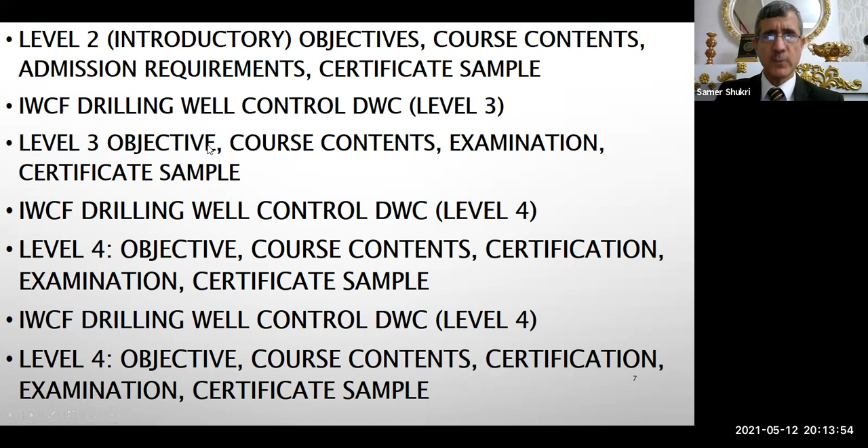Here we have IWCF well intervention. We will talk about drilling and well intervention - program objectives, training levels, program structure, certification, principles and procedures, courses, course contents, well life cycle, and well control. This agenda will also cover completions afterward, and then we will move to typical permanent completions, barrier principle, hydrostatic barrier, types of barriers, then completion components, which we'll take one by one.

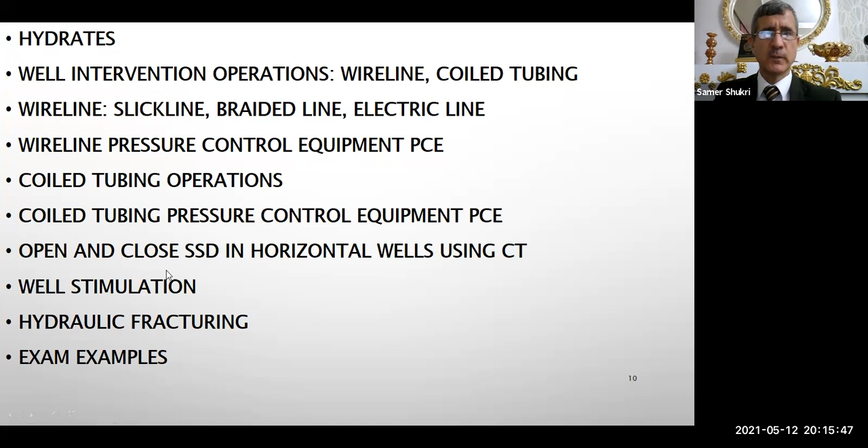Then gas lift system, then well kill methods - we have four kill methods. Then kill charts, we'll explain about them. Even if we take more time, no problem, now you are ready to receive information. We will talk about hydrates that can plug the tubing and flow line. We'll talk about wireline intervention, the types of wireline, wireline pressure control equipment. Then we'll move to coiled tubing operations and the pressure control equipment, opening and closing SSD in the horizontal section using coiled tubing, then well stimulation, hydraulic fracturing, then exam samples. I will give you the same exam questions and answers that come up in the exam, so at the end of this session you will have an excellent view of what is going on with well control.

Let's move on to the first item in our session for today. So what is well control in oil and gas operations? Well control is the technique used in oil and gas operations such as drilling, workover, well completion, and well intervention, for maintaining the hydrostatic pressure and formation pressure to prevent unintentional influx from the reservoir or formation to the surface or to another formation. So this is the definition of well control.

But how can we achieve this well control? Now I will tell you something about what happened after the incident in the Gulf of Mexico in 2010. After 11 people were killed, and after 4.9 million barrels of oil escaped into the Gulf of Mexico, it was a big disaster that remained for 87 days. The well was flowing into the ocean, into the Gulf of Mexico, and 11 people were killed, 20 plus people were injured, with huge damage to the equipment, the environment, and the reservoir, plus money loss.

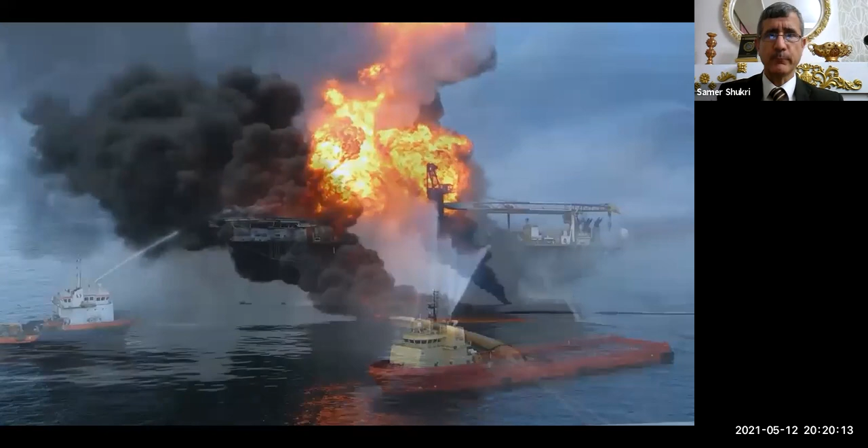The Macondo tragedy, which resulted in the loss of 11 lives, as well as major environmental and economic damage. The International Association of Oil and Gas Producers recognized that all who are involved in any operation during the life cycle of a well in any way should have training to understand well control.

The oil and gas industry operates across a global network, encompassing a vast variety of professions and personnel. It is not only those who work on the rig floor who must take responsibility for safe operations. It may be that someone working on the periphery of the industry lends support or understanding after the crew has had a difficult trip. It may be that someone working in logistics goes the extra mile to ensure that the correct people and equipment arrive on site in good time.

This means it's not only the man who is on the rig or on the well who has to take this certificate. Look at this man, he is driving a road tanker. He is moving liquids and fluids to the well site, and even though he isn't on the well, he has to be aware of what is going on. This man is in the main office of the company, and this girl also, she is watching what is going on at the well. She has to have her own well control certificate.

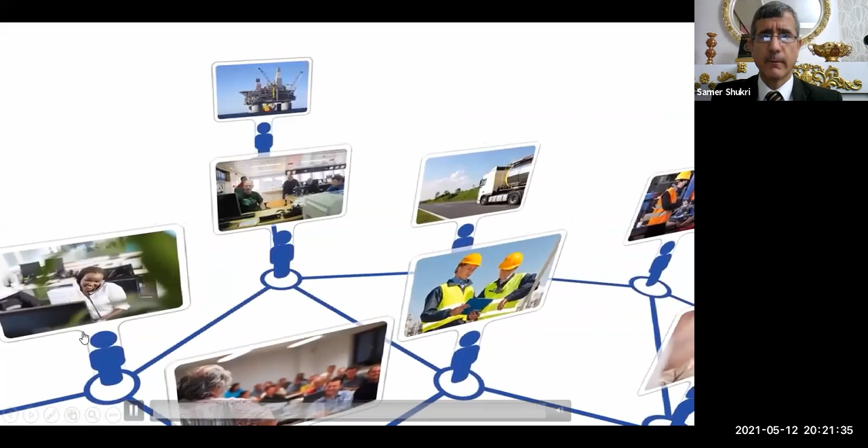Whether an experienced individual or a newcomer to the industry, everyone's input and decisions can have a significant impact, not only upon their immediate colleagues, but also the environment and the safety of personnel across the industry. The International Well Control Forum, in cooperation with Oilennium, has produced a free, self-enroll e-learning program to give knowledge and understanding of the processes that take place during a well's life cycle. While by no means exhaustive, we believe the program will provide people with a broader awareness, which will make their career in the oil and gas industry safer and more rewarding.

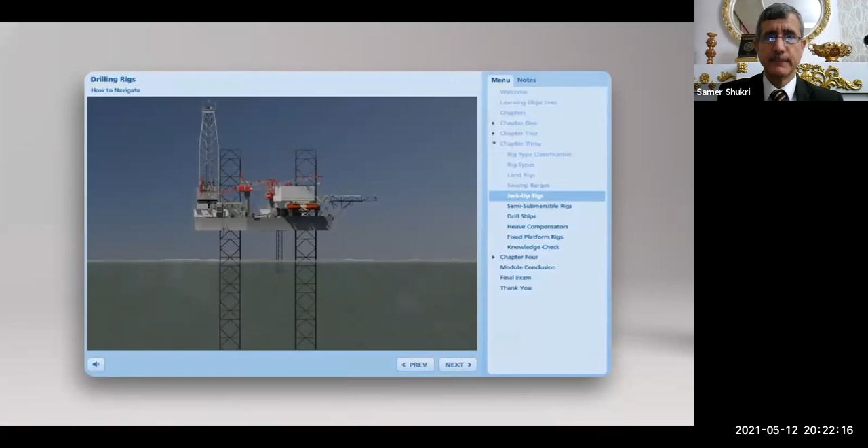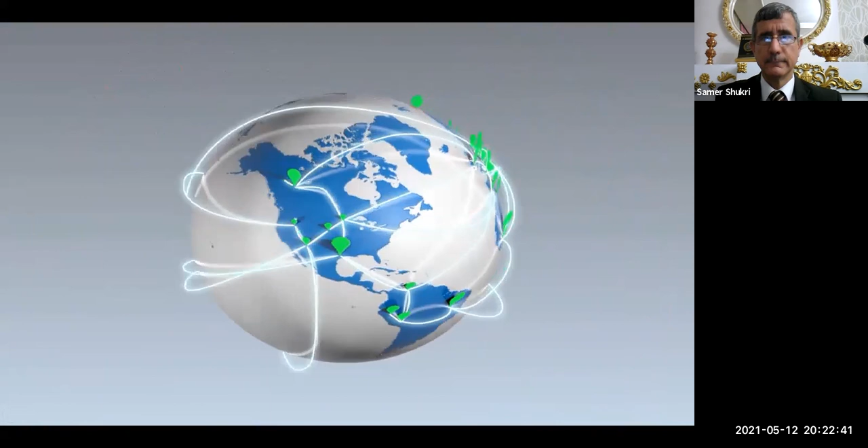Over 7 modules, the program describes the life cycle of the well, shows the different types of drilling rig, explains what well control is, describes how we monitor the well, and explains what well interventions and workovers are. In the first 2 weeks of its launch, more than 2,000 individuals from over 1,000 energy sector companies in nearly 100 different countries enrolled on this course and took a step towards a commitment to protect the environment, our industry, and all those who work within it.

Clear? I think it is clear. So everyone, even if he is new, or old, has good experience or little experience, everybody should have his own certificate. It depends on what his role is in the operation. Is he supervisor? Is he operator? Is he driller? Everything is included.

So everyone has a syllabus. Imagine if we don't control the well, same as what you have seen in the Macondo incident, which is the most dangerous incident, where this huge volume of oil escaped from the reservoir to the environment. In this incident, 4.9 million barrels of oil escaped from the reservoir to the Gulf of Mexico.

It killed the life there. No fish, no whale, nothing. It even arrived to the southern coast of the US. In this case, what happened? All animals were killed. We have a big disaster for the environment, the sea environment, also the coast environment.

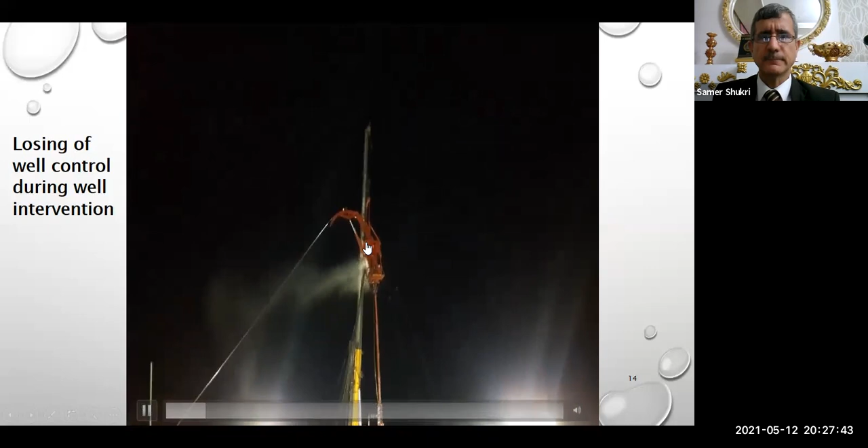You see this gas also, it is escaping during night. A spark, small spark, it will make a disaster. Yeah, it's not good.

Here we will talk about these two sections: this is during drilling, this is during well intervention. During drilling, when we drill a well, there could be losses either from the well to the formation or vice versa. So we may expect that oil and gas will escape and percolate up the well to the surface.

What will happen to the hydrostatic head of this drilling column mud, or drilling fluid? Its hydrostatic head will be less. If it becomes less, then the flow from the reservoir to the surface will increase, and we will have a kick. This kick will lead us to blowout, which we have seen in the previous video or videos.

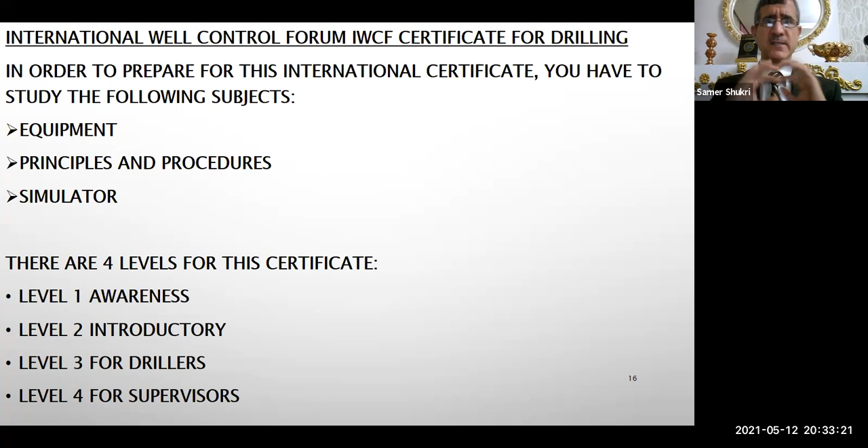But by the end of this course, if you pay attention and can understand what I am talking about, at least you will have knowledge of about 30 to 40%. So if you study more and more, I guarantee you will pass it easily. I will give you examples of the exam given in a normal situation. So I just want you to focus, listen and watch what I am talking about. I'll give you the summary of it - you don't need to go into details here and there. Only focus on this lecture, and I guarantee it will be a very good starting point for you.

So we will talk about this IWCF forum certificate, which is from Britain, and the other one is called IADC, which stands for International Association of Drilling Contractors. This certificate is issued from Houston, Texas, in the United States.

It is mainly focusing on the US fields, and sometimes they ask for it in Saudi Arabia. These are the only two areas, but this one is more difficult. IWCF is more strict than IADC, so if you pass IWCF, I guarantee you will pass IADC, because it is a little easier than this one. British is more difficult.

They focus and sometimes play with words, especially if it is not your native language, so they can trick you with tricky questions. You have to know English and know the technical side, and that is not easy at all. But most of our students pass this exam with high marks, so please focus with me and listen to what I am talking about.

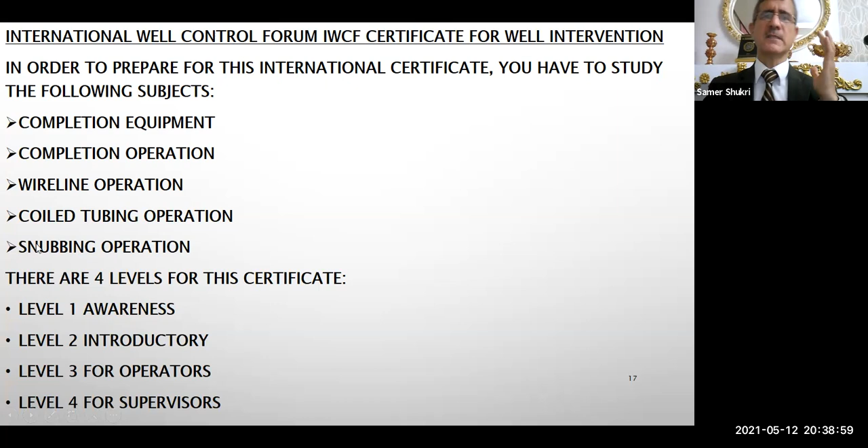But wireline and coiled tubing, you see everywhere, especially in Iraq, Saudi Arabia, UAE, Kuwait, and other countries. You have to study these, plus completion normally. The well without completion cannot be producing.

We have 4 levels. Level 1 is awareness, and you have to do it. You have to choose where you shall go in your career for the future, whether in the drilling direction or production engineering, well intervention, or well services, different names for the same duty. You can do level 1 awareness for drilling or for well intervention, which is called well intervention in both IWCF and IADC.

If you go up, you go to level 2 introductory, level 3 operators, and level 4 supervisor. It is similar for both well intervention and drilling.

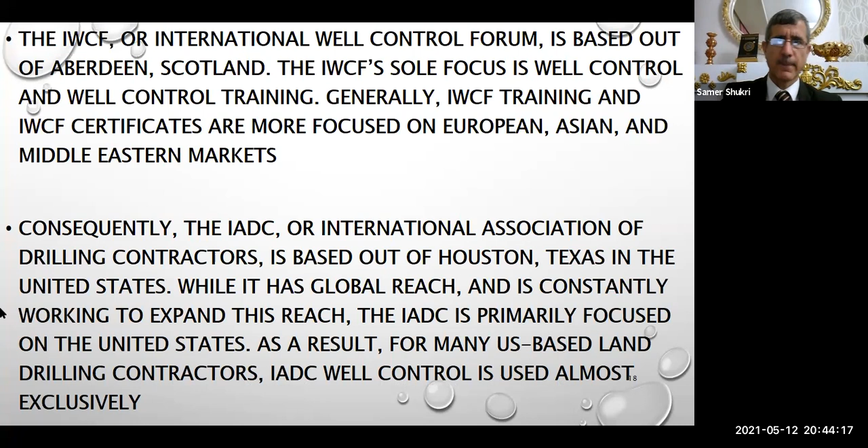I visited this area. I went to Holland, to Shell company, and studied there. So I saw this North Sea. It is a huge and terrible sea.

Let's move on to the next slide. They use different names for course levels, but both IADC and IWCF have identical levels. This one has 4 levels and this one has 4 levels, same. Both organizations in the well control training world recently made fundamental changes to their structures based on a recent report.

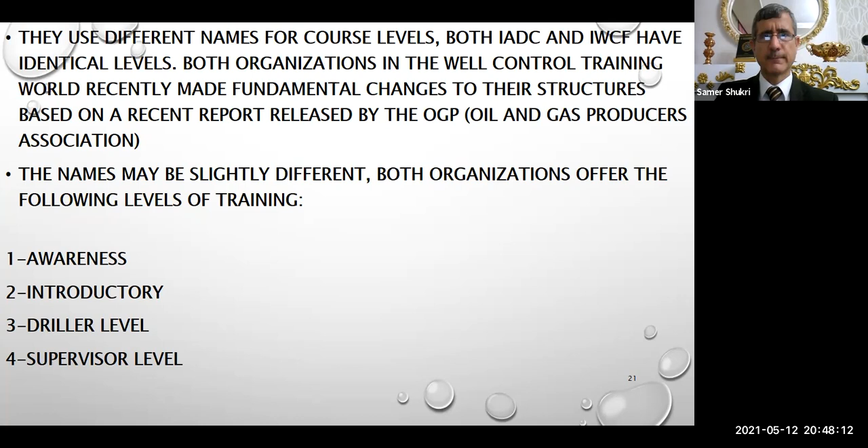Here are the subjects to be studied and assessed. For drilling, we talked about equipment, principles and procedures, and you have a practical assessment. There is something called simulator equipment, as if you are on the rig side, you do this assessment and your result appears straight away. But for well intervention, you have to study 5 or 4 or 3 subjects.

I told you which is mandatory: completion equipment plus completion operation. You have to do these 2 exams, no way around it. Then you can choose number 3 or number 4 or number 5, or this plus this, whatever you want, since you are paying. You can take the certificate. So you can choose what you want before the course starts.

Here, drilling level 1 is awareness. It is a 4-hour classroom-based course currently. So you do this course for 4 hours. There are videos you can watch, and there is a question and answer at the end of each chapter. The total is 4 hours, and the answers are very easy. I will tell you how you can get it, but it is a 4-hour classroom-based course currently included in a 3-day essentials, but now it is done online.

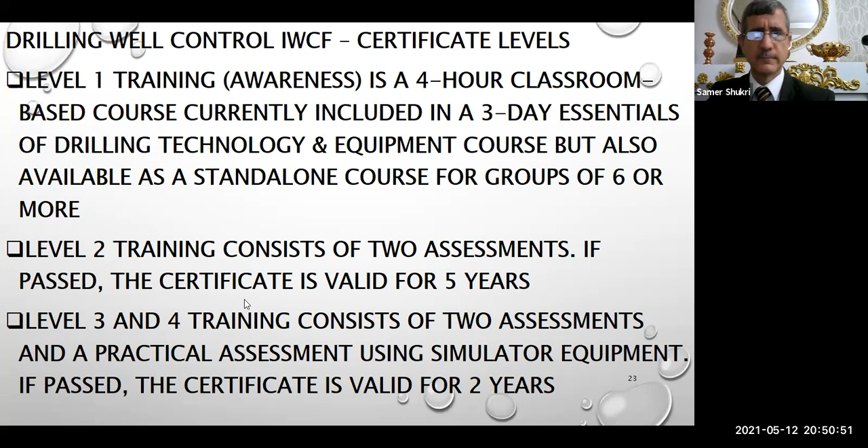Here, level 1 well control awareness training was introduced in 2015 as part of an industry-wide initiative. What does it cover? It covers basic well control concepts and is included in Aberdeen Drilling School's 3-day essentials of drilling technology and equipment course. Here, to register in level 1, you can keep this email with you.

It is very easy. Level 1 at iwcf.org, you will see it in the video at the end of this course. You will keep your video with you, and you will see that you can pass it easily to the website of IWCF. You see, if you write this, I took a snapshot, you see it: www.iwcf.org/programs/level1/DS. You will see this one.

It will tell you where to go, group level 1 course. So you can go through them, and you will see that it is easy. They tell you how to go into this level, how to register today. This is the website of IWCF. Register today. If you want to use the email also, they can guide you. So it is very easy.

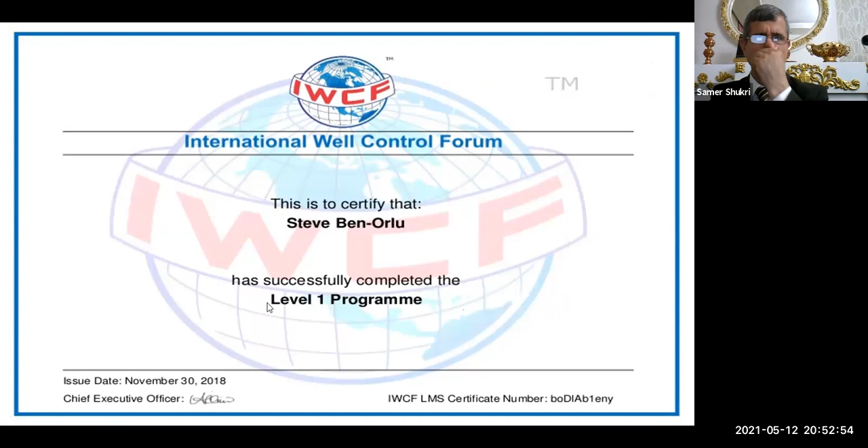Here, level 1 also, what does it include, and the validity, and so on, successful completion - all of these we covered. Here, you see this certificate. Every one of you should show us this certificate by the end of this month. It is easy, either for drilling or for intervention.

You see here, this is to certify that Steve Ben-Orlu has successfully completed the level 1 program, and here is the signature of the CEO of the IWCF. It was issued at the end of 2018, and it has a certificate number - you see this one, BODIAB - and so you can take it with you.

Here, drilling also, we will talk about drilling well control level 2. This introductory course provides drilling personnel with basic understanding of well control. Here you have to dig deeper, but if you don't go through level 1, you will not be able to go to level 2, then level 3, then level 4.

So it is like a building - you build this one above this one, so the science is a structure. If you want to jump without a base, in this case you will fall down, and your neck will be broken.

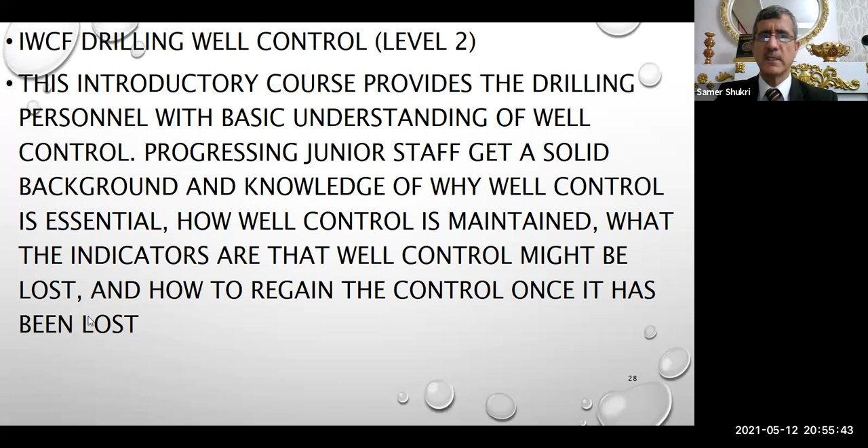Here, he has a solid background and knowledge of why. Here, he has to be responsible. Now, in awareness, you are not responsible to do anything. But here, he has to be responsible for well control. He has to open, to close. He has to do something during an incident scenario, how well control is maintained, what the indicators are if well control might be lost. So he has to make his brain work, and how to regain well control in case it has been lost.

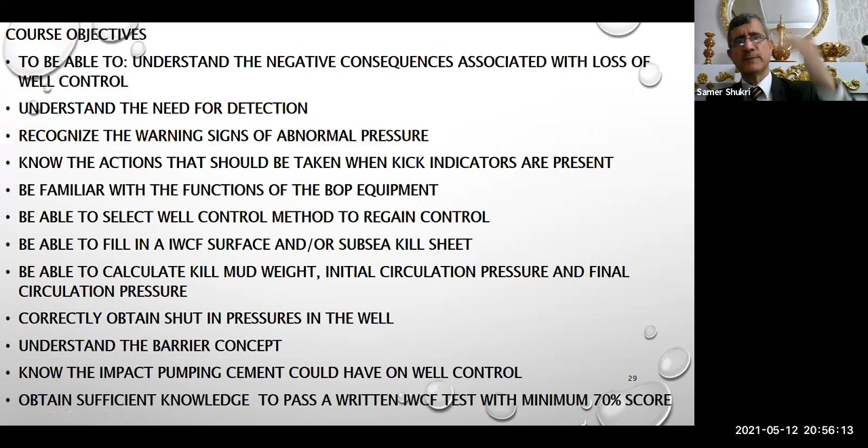Here also the objectives, you can go through them for yourself, because you have to go from level 1 in the future to level 2, from level 2 to level 3 to level 4. So just for your information, please. You see course content, this is for level 2.

Here also the assessment exam, there is a normal exam here. They have to give you a certificate for 5 years. The validity is 5 years. So for these 5 years, you have to be competent.

You have to do surface equipment for 1 hour and 10 minutes. Surface principles and procedures, 1 hour and 45 minutes. Then combined surface and subsea - this is for offshore, also same time. Here, combined surface and subsea principles and procedures, same time.

This one, sample of level 2. You see, this is temporary. So after you do the exam, they give you a temporary certificate. It is valid for 3 months. After 3 months, it will expire. You have to take the normal one, which is for 5 years for level 2.

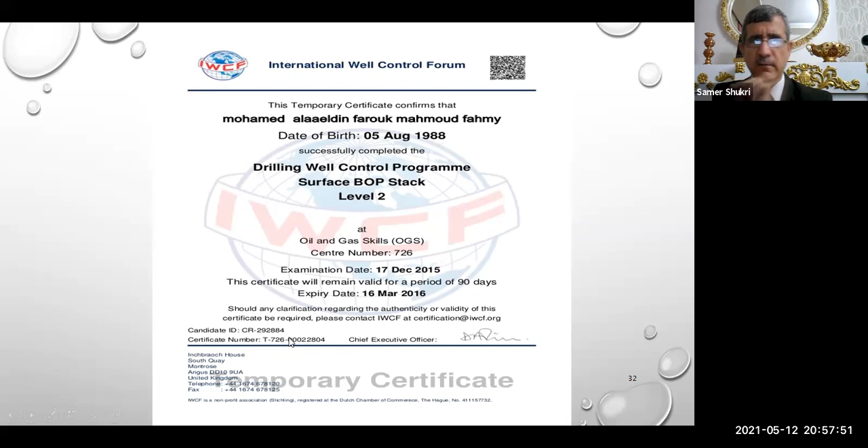For level 3 and 4, it is valid for 2 years. You see, his birthday is written here, 1988. Here, the certificate number also, candidate ID, and the CEO, Chief Executive Officer of the IWCF. So it is formal, and it allows you to work in any reputable company in the world.

Here we have also level 3. This level 3 objective, now you dig deeper for level 3. The IWCF drilling well control level 3 course has been designed for whom? Who can attend it? Anyone expected to shut in the well, such as drillers and assistant drillers. So everyone has his own function, position, or responsibility. This level 3 is for drillers and assistant drillers.

The course aims to reinforce and improve the candidates' existing knowledge and appreciation of the various stages of shutting in the well, in case of kick or blowout. So the engineer or supervisor by himself will do nothing by himself. He needs the driller, he needs the assistant driller, he needs other people to help him. Otherwise, he will lose focus and not do his job properly. So everyone on the well site has his own responsibility, and he has to know what is going on and take quick action in case of any kick or blowout.

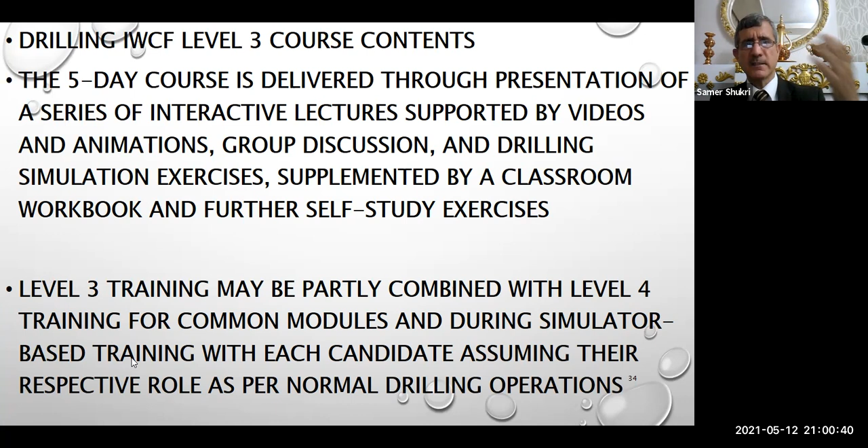You see, level 3 training may be partly combined with level 4. So in many cases, they are very similar, level 3 and level 4, but level 4 is more advanced. With level 3, they give you 26 questions in well intervention, while in level 4, they give you 28 questions, 2 additional questions. For other materials, it's the same. And the same validity, level 2, level 3, and 4, for 2 years.

Here we have also the time for the exam. You see it, 1 hour and 45 minutes - this is for principles and procedures. While for equipment, it is 1 hour 10 minutes. Here for working in the subsea offshore. Here is the sample of the certificate. Also, this is a temporary certificate, level 3.

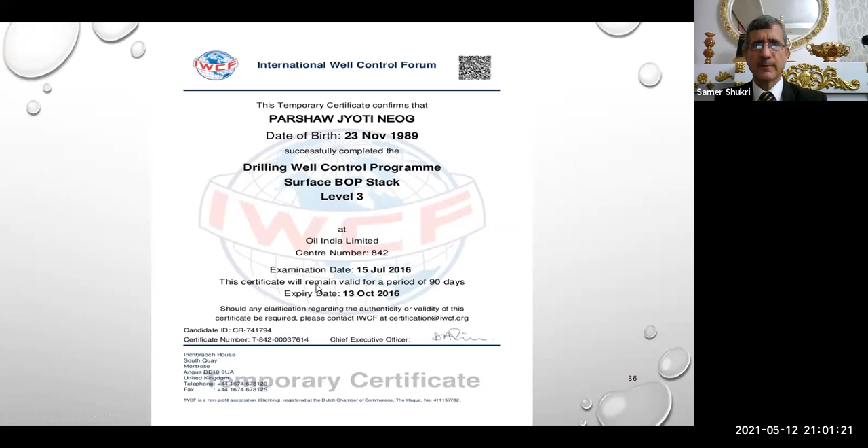Level 4, it is digging deeper. Here you can say that this is used for supervisors. And it has 2 years validity, same as level 3. IWCF level 4 certification, 5 days, 2 years.

Candidates can select surface only or surface and subsea. If you want to work onshore only, not in the sea, you choose surface only. If you want to work both, you have to use combined surface and subsea stack, BOP stack.

Level 4 has certificate of 2 years assessment exam. Practical assessment also, there is a simulator exam. I told you, as if you are sitting in the rig and you have to kill the well, what do you do? What is the type of calculation that you have to do?

So it is either face-to-face or this level, which one? Procedures and principles plus equipment, it is either online or face-to-face. While this one, the simulator, it has to be face-to-face, mandatory, because you have to do this under the responsibility of your assessor. So if there is no assessor, how can you do it?

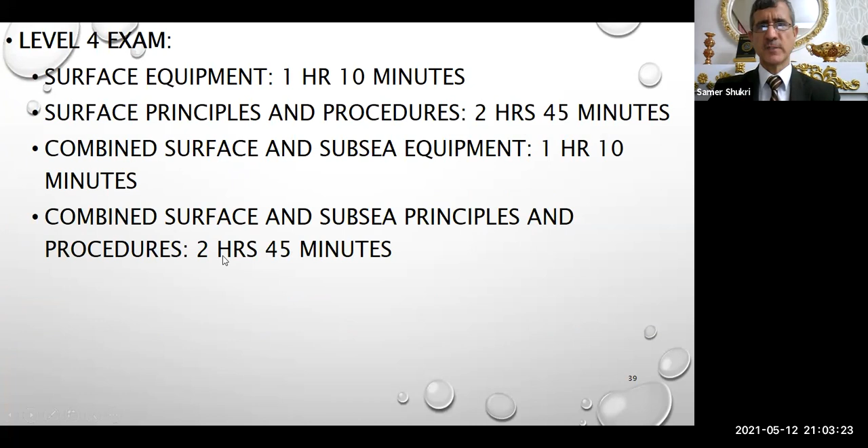Level 4 exam, this is the time also for subsea. Here is the exam, example of the certificate, level 4.

IWCF well intervention, it is very similar to drilling, but the syllabus is different. Program objectives, you have it here. It talks about completion, and this program is for people who are in critical well control positions during well intervention operations. Candidates will complete an accredited training course, taught according to IWCF syllabus.

We have a syllabus for well intervention, so you have to study it and you can see. If you want, I can send you the syllabus. If Mr. Athir reminds me at the end, I have the syllabus, and you can go through one by one, these items, to see yourself that you are very familiar with it, to prepare for their assessment. So you have to have your syllabus.

I will provide you. Different levels of training are available, same as that: level 1, level 2, level 3, level 4. So it is clear, level 2 is 5 years, level 3 and 4 are 2 years.

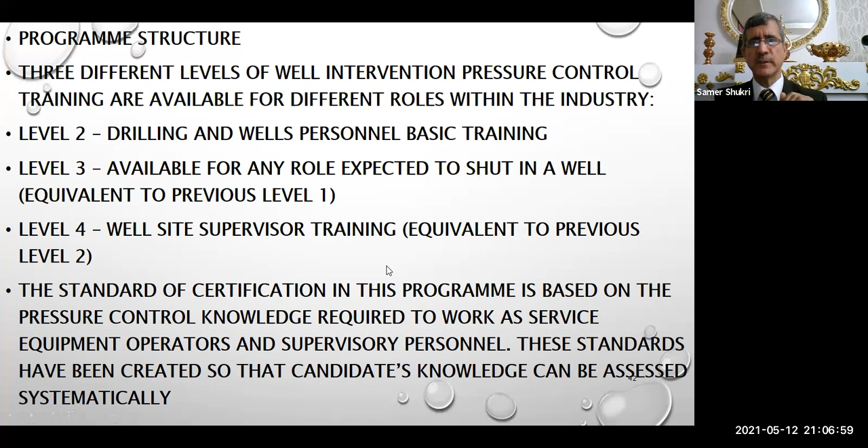Here you can study these. We talked about them. We have barrier principles, well information, shut-in procedures, pressure control methods, problems, pressure control management. All of these, I deliver them in the IWCF courses.

So last course, I spent 28 hours, and I am talking like this, 28 hours within 4 days. So it is not easy. I am talking and you are listening, you are watching, but at the end, you have to study them and do the exam to pass. If you don't pass, it will not be good for you. But as you are preparing yourself early, you will pass it very easily.

Candidates must attempt both compulsory components, this is mandatory, and you can choose one or more optional components, which is wireline or coil tubing, snubbing, in a combined certificate program. They write for you wireline and coil tubing, you are certified. If you have snubbing, they write it for you, snubbing, and so on.

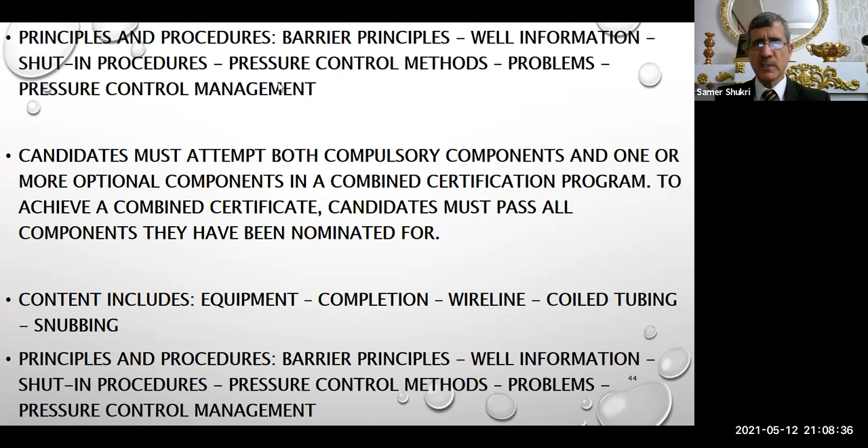Now, content includes equipment, completion, wireline, coil tubing, and snubbing. Principles and procedures, same as this, repeated.

Let's move on to the well life cycle. We took it in the last lecture. I think if you remember, well life cycle, we start with well construction, which is drilling and completion. Here you have to have the IWCF or IADC for drilling. In the maintenance, workover, and well intervention, here you have to have well intervention, IWCF or IADC. Here, production, there is no intervention from our side, and in the plug and abandonment, the well is closed.

Here, we have the well control calculations. These calculations and laws should be memorized in your brain, very strictly. There is no compromising. Hydrostatic pressure equals TVD, true vertical depth, times density times constant. So this, you have to memorize it as if it's your own name. Don't tell me that you forgot that one question can make you pass, and one question can make you fail.

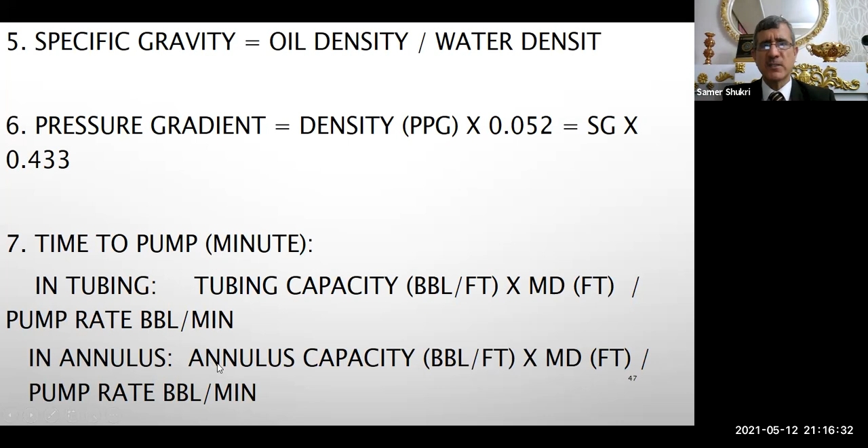It may not be clear for you now, but if I give you a question including calculation and you sit down and think about it using these laws, it will be very easy for you. Time by time it will get easier and you'll find the solution very easily. For annulus: capacity times measured depth divided by pump rate in barrel per minute.

For the completion, for the type of wells, we have exploration or production. Exploration is when we start drilling in an area for the first time. Production is when we have drilled before but want to improve this field, so we call it a production well.

We have also vertical, deviated, and horizontal wells. So at 90 degrees, it is horizontal.

We have all well types as per the production phase. We have oil producer, gas producer, water injector, gas injector. We have WAG: sometimes we inject water, then stop and inject gas, then inject water, then inject gas. We call it WAG, water alternating gas injector.

Then we have water supply well, and water disposal well. I think you have to memorize these well types also, because you have to use them in your future.

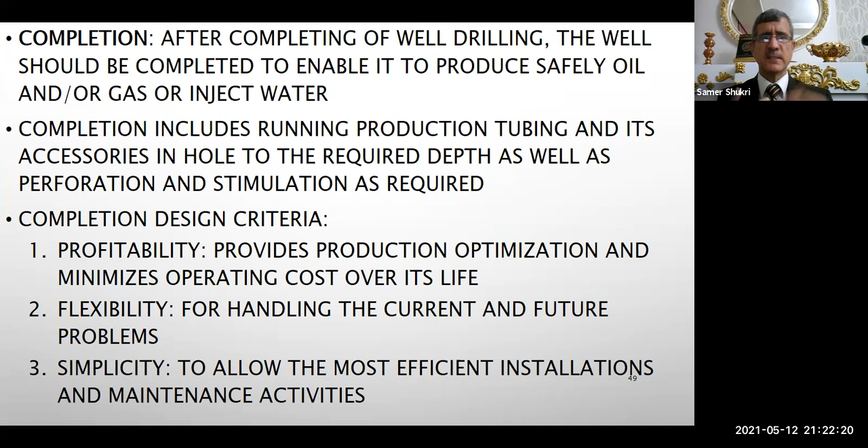Simplicity allows the most efficient installation and maintenance activities. So if you need an F nipple, you run F nipple 1, 2, 3, or 4. If you want an R nipple, you run it. If you want an SSD, if you want subsurface safety, all of these should be there in the completion.

Downhole emergency isolation: if you have any problem downhole, you have to isolate it. You can set a wireline plug and isolate it.

It permits downhole chemical injection. You can run a control line to a certain depth and pump chemical injection, so you can protect your completion and your well. It also permits downhole measurements: if you want to do a pressure and temperature survey, then you can run a downhole gauge.

Isolate producing zones: sometimes you have 3 zones. How can you produce from one and close the other one or other two? In this case, we have selective completion. We run 2 packers or 3 packers or 1 packer, so we can control our production as per our strategy and how we plan to produce from the well.

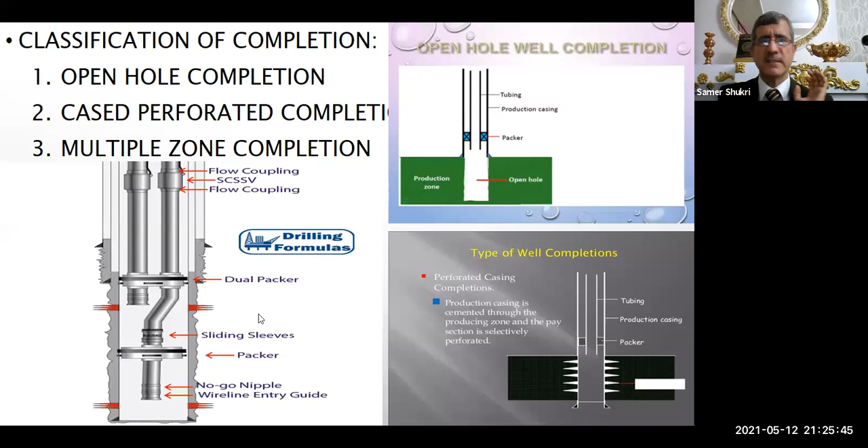Here we have a sliding side door (SSD). If we open this one, we can produce from this SSD to surface. If we want to isolate this zone, we set a plug here. If we want to produce from the short string, we produce from this upper zone. So it is like an art. The completion design is very interesting, and you can have too many funny but useful things, and it is a science.

Now we have completion types for natural flowing injection wells. We have single completion, single selective completion, dual completion, and dual selective completion. These are the types.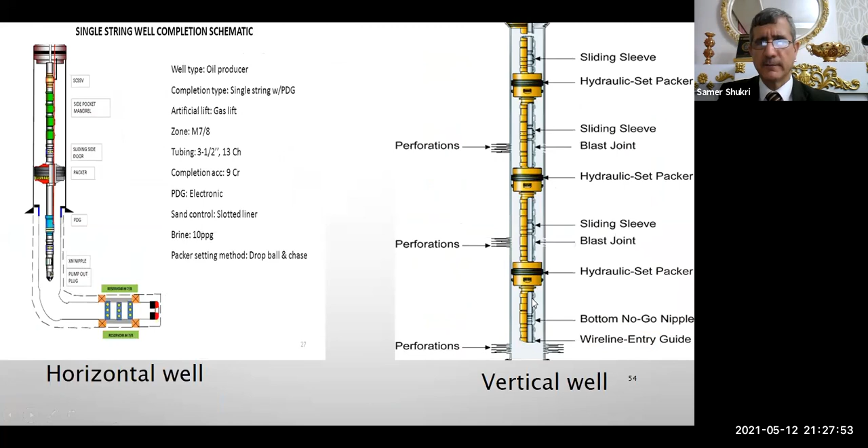Here we have 2 types of well: horizontal and vertical. You see, this is vertical well, and this is horizontal. This is typical permanent completion and the accessories in the completion. You can start from bottom till up, from wireline entry guide till wellhead, one by one.

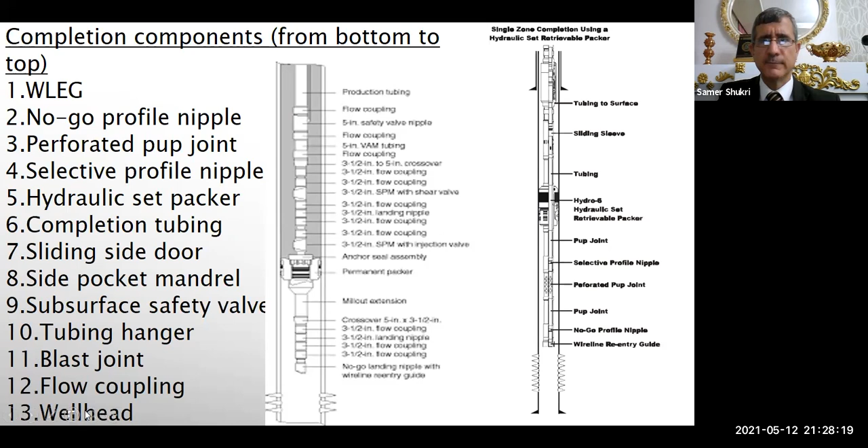So watch this video. It is the barrier definition here.

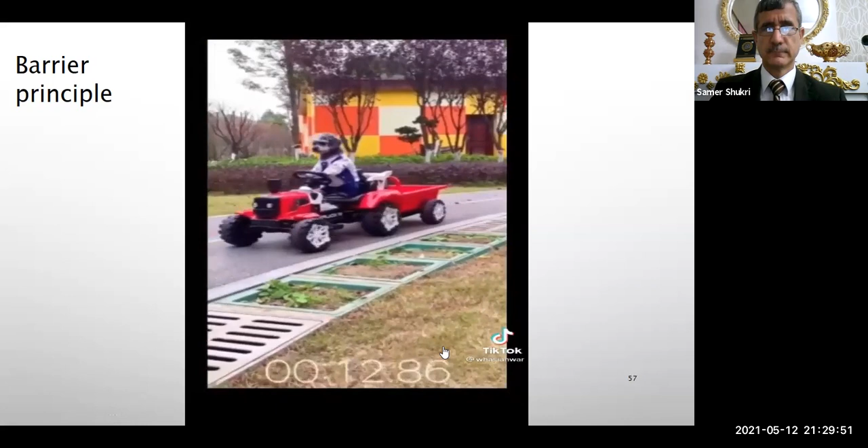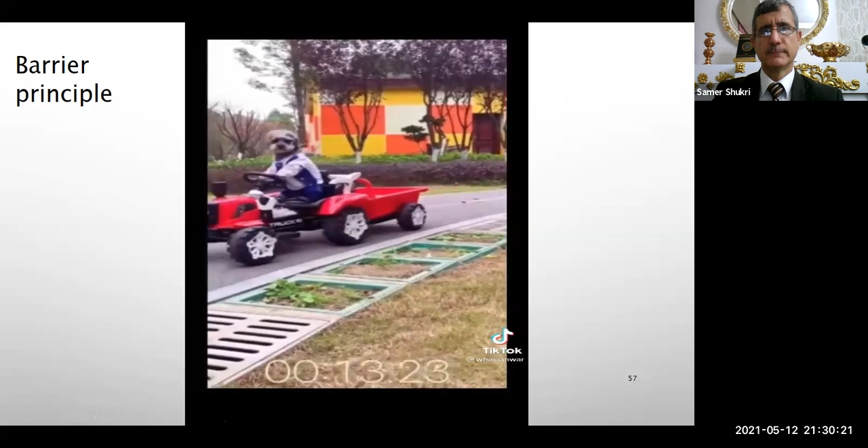Here we can see well control and barrier definition. Well barrier, as I told you just now, is defined as a component part of well designed to prevent fluids or gases from flowing unintentionally from a formation into another formation or to surface. This is very easy - if you memorize it, you will use it for your future certificate and assessment.

Barrier theory, definition of a barrier: any device, fluid or substance that can hold wellbore pressure, either tubing, tubing hanger, packer, or whatever. The aim and importance of using a barrier is to contain well pressure and work safely on the well. If you don't have a barrier, you will not be able to work safely on the well. So you have to take this barrier.

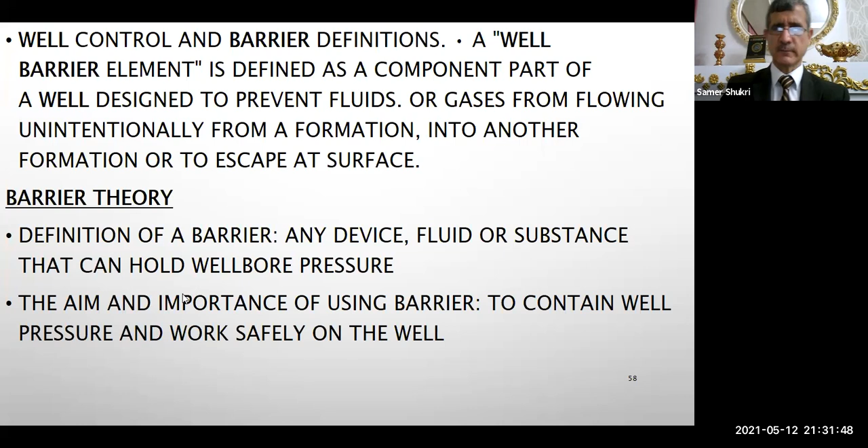Barrier types: we have two types of barrier, a fluid barrier and mechanical barrier. During drilling operation, a minimum of 2 tested and verified barriers should be used. This is a dead well. While in well intervention, we work on a live well, and we have to use a minimum of 3 tested and verified barriers. So this is the IWCF rule.

If you use 2, it is not required. Even if you have low pressure, if you have 150 psi wellhead pressure, and he asks you, can you work? You tell him no, you need 3 in well control. Hydrostatic barrier, you go through all of these, how to calculate the hydrostatic pressure and so on.

Mechanical barrier is also any substance that can be set in the flow path and prevent the flow of wellbore fluids unintentionally. So if you set the plug, wireline plug, it will plug the well and will not allow it to produce to the surface or to another reservoir.

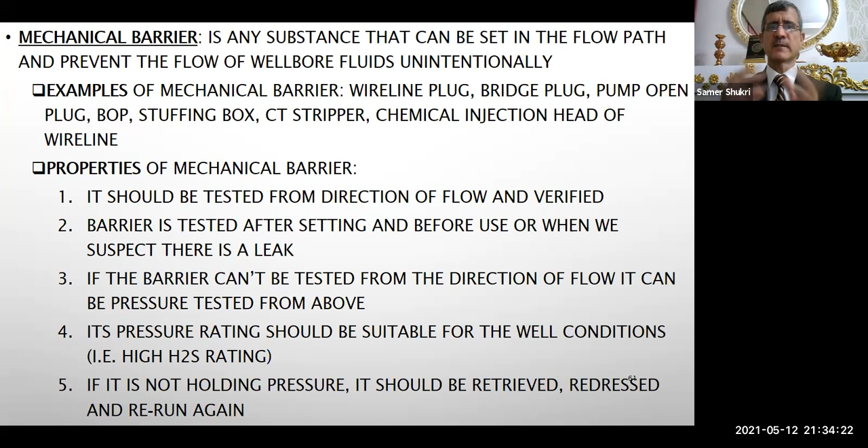Classification of barriers: we have a primary barrier and secondary barrier. A primary barrier is the first line of defense and can hold well pressure. It should be leak tight - there is no leak, zero leak.

Secondary barrier is the second line of defense, in case the primary barrier fails, it can be used. So if the primary barrier has failed, then you can go to the secondary barrier. Then you can fix the primary barrier and return it to normal.

In well intervention, the primary barrier in wireline operation - what is it? You have stuffing box or chemical injection head for wireline. The secondary barrier is the BOP. Tertiary barrier will be the upper master valve. While in drilling or workover, the primary barrier is the drilling fluid, and secondary barrier is the BOP. You have to understand this and memorize it, please.

So we use this one, quad BOP for coil tubing. This is for wireline, dual BOP. Stuffing box - these are examples of barrier. Stuffing box for wireline, chemical injection head. This one for wireline, either electric line or braided line. And here we have a stripper. This is for coil tubing, also quad BOP. This one, hydraulic quad - here we have lubricator, you see it, and here stripper.

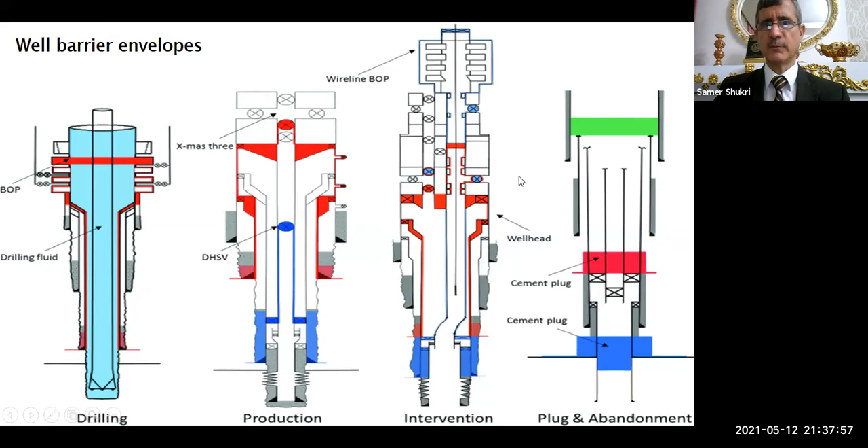Here is the tubing hanger. We set it at the top. It can hold the completion tubing and isolate between tubing and annulus.

Here we set the back pressure valve. Here is two-way check valve, to isolate above the tubing hanger from below, or to test the Christmas tree.

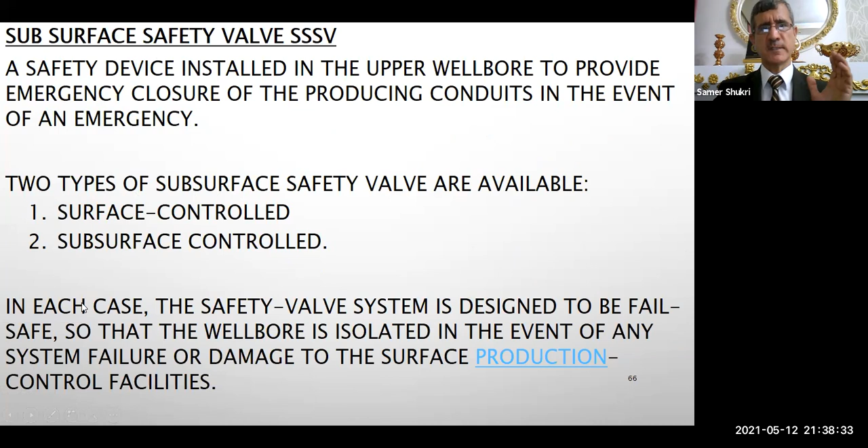Here, subsurface safety valve - we have two types, tubing retrievable and wireline retrievable. It can close in case of an emergency. You see wireline retrievable, it can be retrieved and set by wireline, and tubing retrievable - we can run control line from surface to it.

It is located almost between 150 feet to 400 feet. So it depends on different properties.

This is the subsurface safety valve, and here is the flapper. You see the flapper, this one - if it is closed, then the well will be closed. If it is open, you see flapper is open here, you see this one, flapper is open, then the safety valve is open. Flapper, this one is closed, then the safety valve is closed. This is closed, you see it? We call it downhole safety valve.

Surface-control subsurface safety valve, self-safety valve, tubing retrieval - different names for the same item. But the most known name for it, we call it surface control subsurface safety valve. This one, surface control subsurface safety valve.

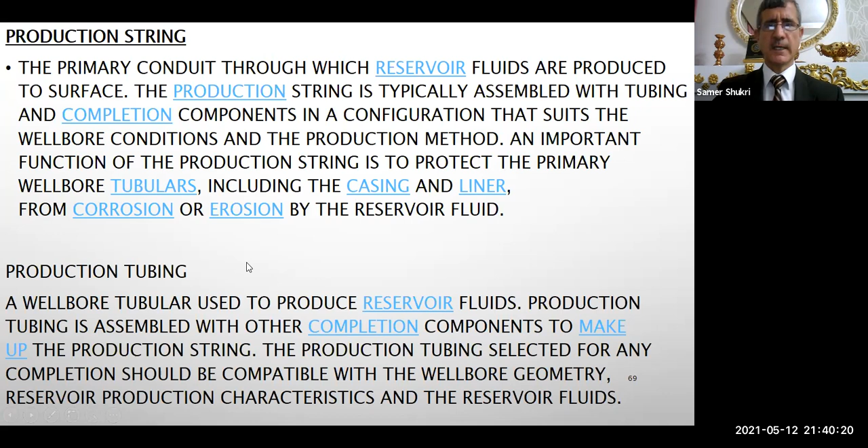Here we can come to the production string. It is a tubing. It has different sizes, either 3.5 inch or 4.5, 2 7/8, 2 3/8, maybe 5 inch. We can consider above it will be casing. Below it, it is the tubing, production tubing. And there are also couplings.

You see these couplings. This we call it J55, this type. This red one, we call it C75. So you can connect this

piece of tubing from above and below using the coupling. We call it coupling. If the pressure inside the tubing is increasing, it will explode. You see, burst. This is burst. Because the pressure from inside to the outside is higher than required. While if the pressure from outside to the inside is higher, it will collapse.

Here, production packer. What is a production packer? It isolates the tubing from the casing, and will make the production packer in safe situation. In this case, we put inhibited water in the annulus and we can make this annulus safe during the whole well life cycle. Based on their primary use, packers have either two types: permanent packer or retrievable packer.

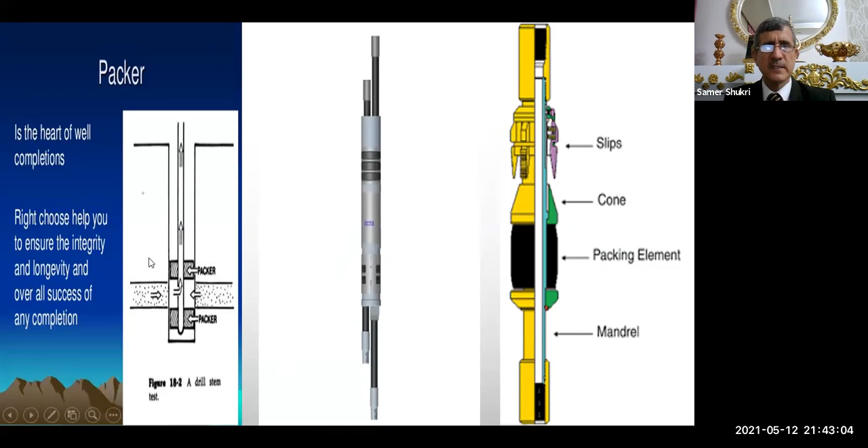Here we have this, we call it DST. We run packer, upper packer and lower packer, and we produce the well from here just to test it. You see it?

Landing nipples, we can set flow control devices such as wireline plug or other tools to isolate the packer, the zone or the completion. Or we can set packer hydraulically by setting plug below the packer and increase the pressure in the tubing. In this case, the packer will be set in place.

We have three types of this, we call it landing nipples. We have no-go nipples. We run it one piece, only one nipple at the last bottom of the completion. Then we have selective landing nipples. For example, 2.75 inch F nipple, then 2.75 inch F nipple, 2.75 F. So three nipples have the same size, and we run them in different depths in the completion.

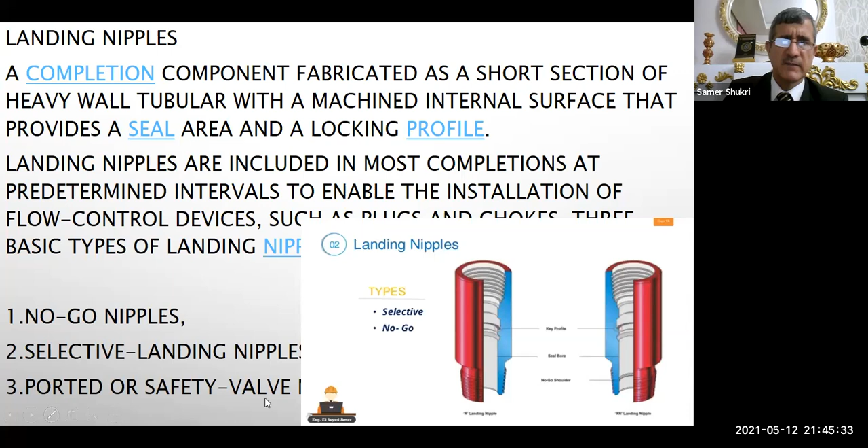Then you can run the wireline retrievable subsurface safety valve inside the tubing retrievable subsurface safety valve, and you set it in this ported or safety valve landing nipple. In this case, you can flow the well or inject the well as normal till the workover comes to the well and retrieves the subsurface safety valve.

Here, no-go landing nipple. It has no-go at the bottom. Selective nipple, it doesn't have no-go. No-go can be found in the plug itself. Here, safety valve landing nipple. We set wireline retrievable subsurface safety valve inside it.

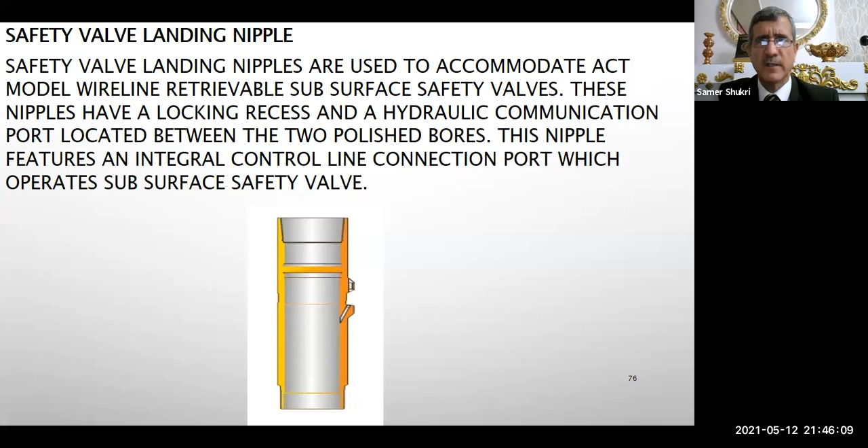Circulation devices, we have two types: sliding side door and side pocket mandrel. This is side pocket mandrel. We set the gas lift valve inside it, or chemical injection valve, or dump kill valve, or dummy valve, different types. For sliding side door, we open it and close either for circulation or for selective production or injection. We will see them. You see, this is SSD. Look at it.

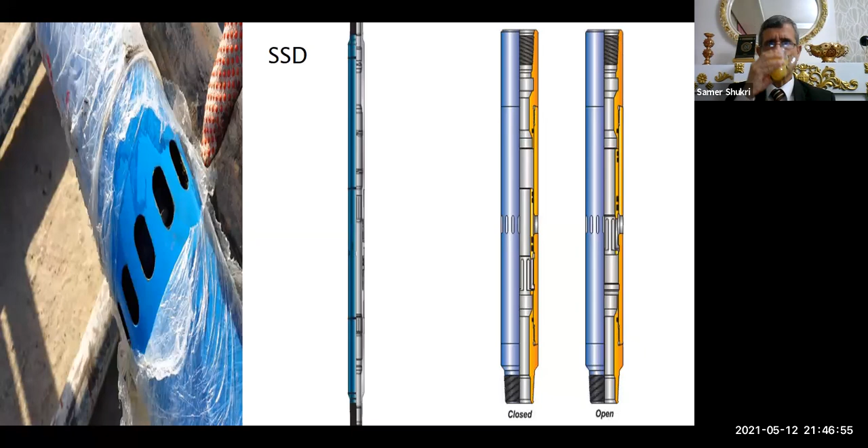This has holes in the fixed part. You see it? In the inner part, we have a sleeve. This sleeve has holes. This is closed. Why? Because the holes in the movable part of the SSD are not opposite to the holes in the fixed part. You see them? Different. So there will be no circulation through this part.

While here it is open. Why? Because the holes of the sleeve are opposite to the holes in the fixed part of the SSD. So there will be circulation. Here is the SSD, this one.

We have another one, called side pocket mandrel. This side pocket mandrel we run with the completion and make circulation or make injection, gas injection. If you inject gas from annulus to the tubing, it will push fluids, oil, and gas, maybe water also, from the tubing till surface. So we can run 1 or 2 or 3 or 4 side pocket mandrels and run gas lift valves.

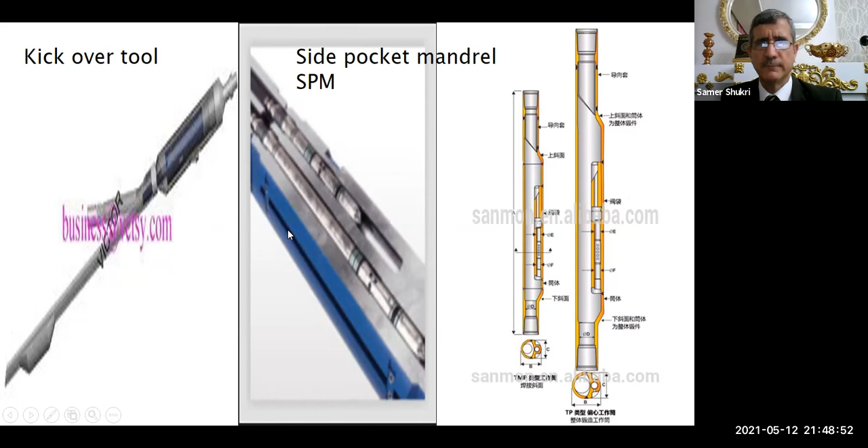We have flow couplings and a blast joint also. You can be asked about them in the exam. Flow coupling is used to reduce erosion and is used upstream or downstream of completion components such as F nipple, R nipple, SSD, subsurface safety valve, and it has bigger wall thickness than tubing. It has less ID of the tubing, while from the outside it has same as tubing OD.

For blast joint, it is used to reduce erosion due to sand, due to fluids from the reservoir to the completion. Its OD, you see this one, is bigger than the tubing OD, while the ID is the same.

Here the flow coupling is the opposite. The OD is same as the OD of the tubing, while the ID is less. You see, this is flow coupling.

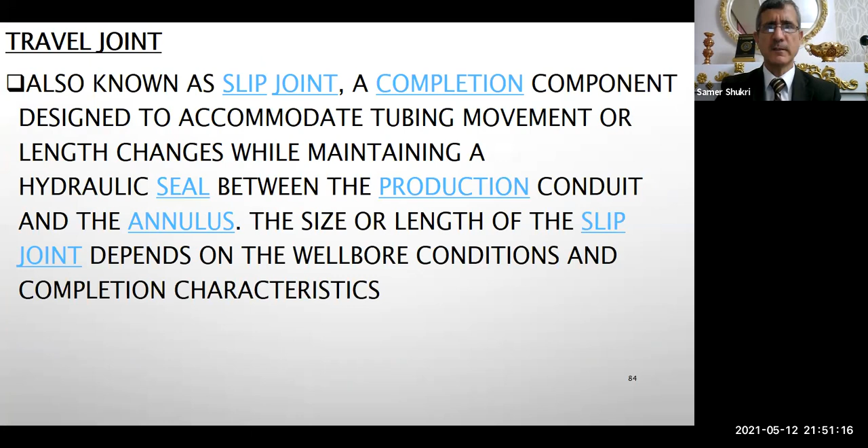Polished bore receptacle, we have this one, polished bore receptacle. We run the packer here, this is the packer, and above it we run the tubing for completion. Tubing and completion, by time, heats up or contracts due to the temperature of the fluid in the well. In this case, what will happen? The tubing will contract and expand. Contract, the volume will be less, and expand, this will make the length of the completion more. So how can we control that?

Using this polished bore receptacle or expansion joint, this one. It is moving, and here we have seals. You see the seals here.

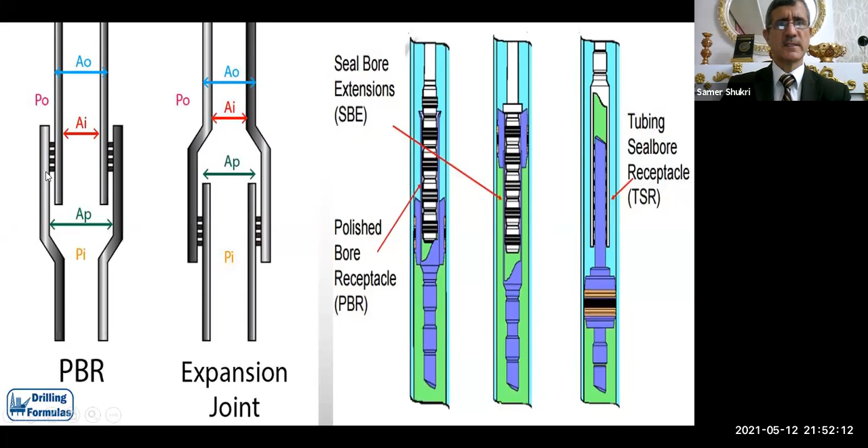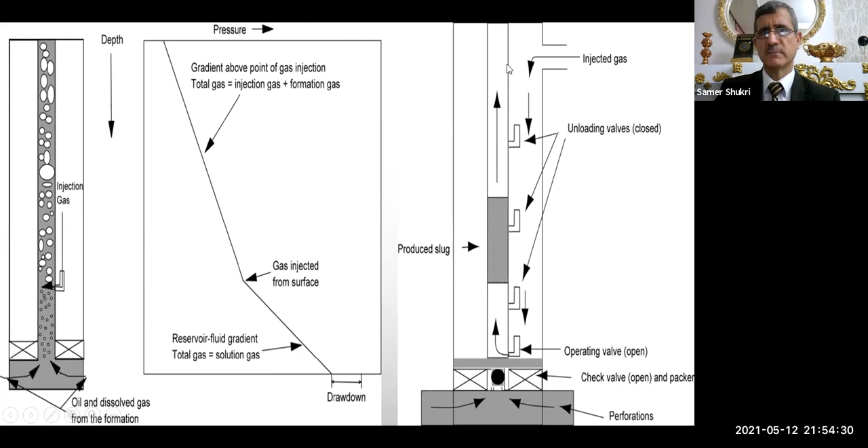If you understand it like this, it will be fantastic. You see gas injection here, and it will shift it up, push it up. And here is the pressure. There is drawdown from reservoir to the bottom hole. This is called inflow. So if anybody asks you what is inflow, you tell him it is the flow of reservoir fluids from reservoir to the wellbore. What about outflow? Outflow is the flow of wellbore fluids from the bottom hole to the surface. So this is the principle.

Well kill methods. We will come to the end of our lecture.

If you want to kill the well, we have 4 types of killing methods: reverse circulation, forward circulation, bullhead, and bleed and lubricate.

Reverse circulation, we pump down the annulus. I will show you. We pump from here, reverse circulation, from annulus till here, till we have SSD here, till the tubing, then up.

If we want to kill the well using forward circulation, we pump from tubing down to the circulation device, SSD or side pocket mandrel, till surface here, up annulus till surface.

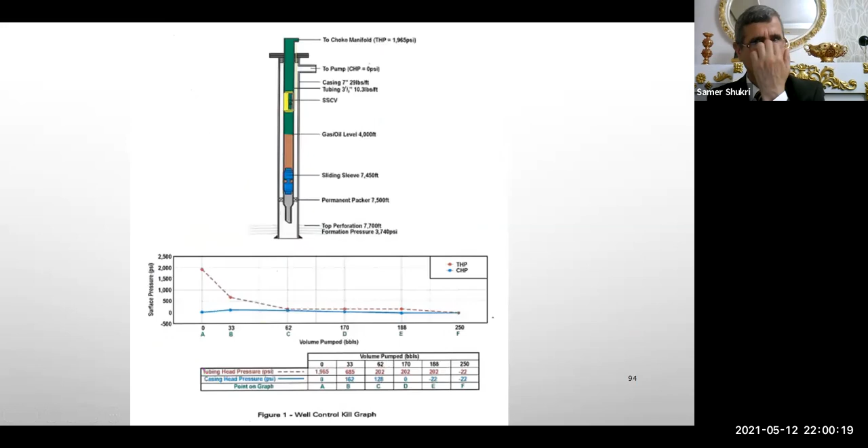Here, in this case, we pump this fluid which has density less than the completion fluid, while in this case, we have kill fluid with higher density than the completion fluid. So if completion fluid is 10 ppg, we use 11 ppg to kill the well. So this is the killgraph.

Here where gas is out, here oil is out, and here we keep overbalance. What is the overbalance? This one. You see it, 202 psi, 202, 202. We keep pressure at surface to keep this well overbalanced.

Otherwise, if we circulate from here to here, we will let the well fluids flow. We motivate the formation to flow through this tubing from the reservoir up to the surface. So we keep overbalance. Here, overbalance is 202 psi.

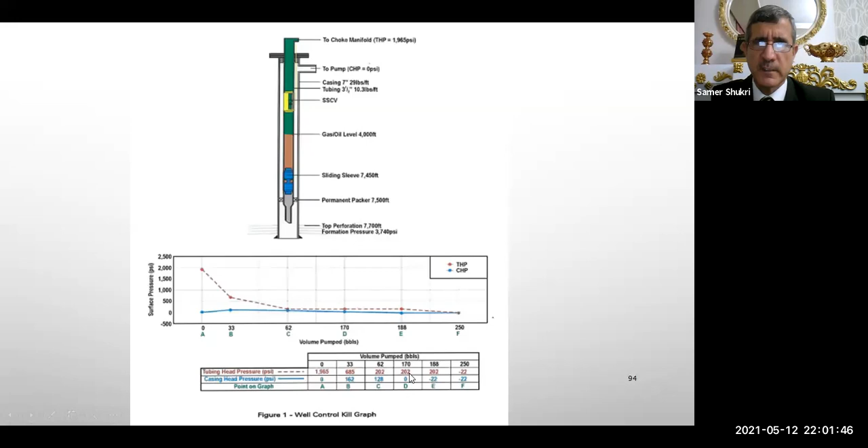Hydrates. What are hydrates? They are crystalline solid compositions formed at the top part of the completion, in the safety valve, in the hanger, in the completion, in the choke valve, Christmas tree valves, flow line - all of these.

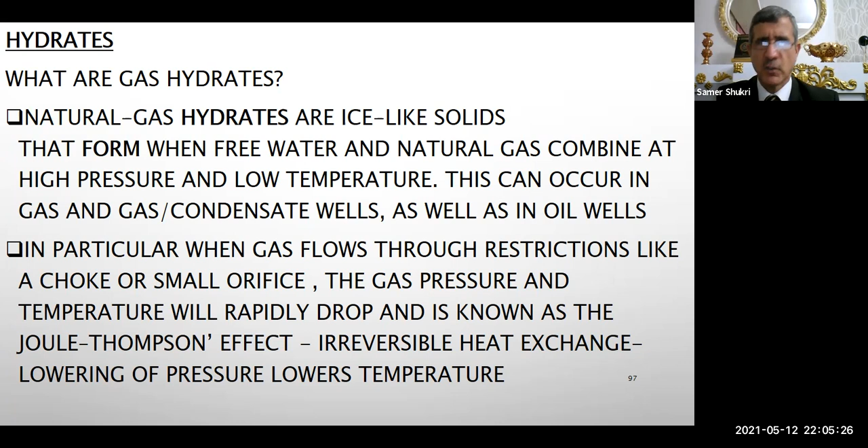So each time, 4 or 5 questions from hydrates come in the exam. If you understand the principle, you will pass these questions. 5 questions means about 10% of the exam, and almost the same questions and answers are repeated. I will give you some of them.

We talked about it - hydrates, we can read them quickly. The 4 things required for formation are gas, free water, high pressure, and low temperature. Injecting brine into the low flow stream can reduce the formation of hydrates. Then hydrates may cause damage if they become free with a high differential pressure, as if a bullet - they can penetrate the flow line or damage the surface equipment.

Hydrates only form if there is free water present. Hydrates are less likely to form if injecting glycol - glycol and methanol, if you use them, less likely to form. Hydrates are common downstream of chokes. All of these are the questions that come in the exam. So if you at least memorize this and the next slide, you will take 10% of the exam.

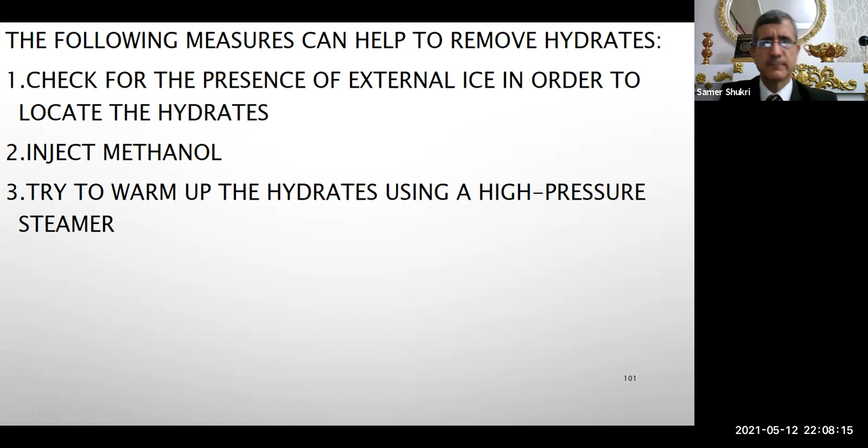This question is repeated in the exam - every exam you can see it. Check for the presence of external ice - I told you that in order to locate the hydrates. Inject methanol. Try to warm up the hydrates using a high pressure steamer or hot water. You see, this is the hydrate.

Well intervention - we have slick line, we have wire line, and coil tubing. Wire line includes slick line, braided line, and electric line. You see, this is called slick line. This is braided line - if there is a problem with the slick line, we use braided line.

Braided line is also used in swabbing - if you want to produce the well by swabbing, you can use it. And electric line is for logging, for perforating, for water shutoff. So you have a multi-conductor in the center - you can send electrical signal, while here you cannot.

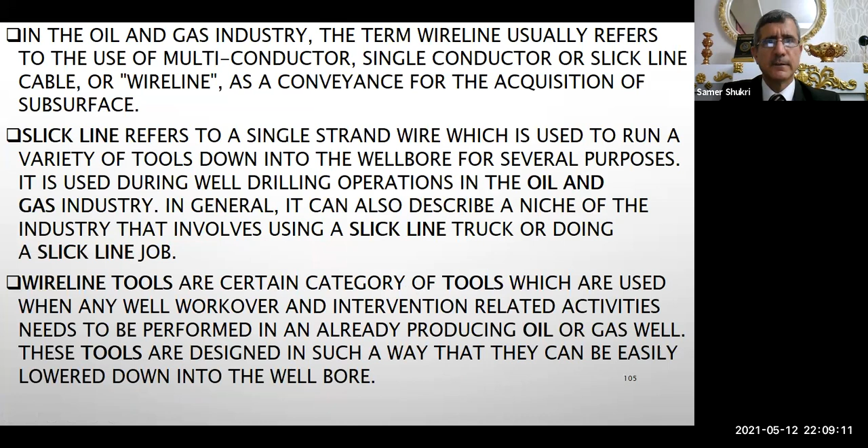If you have a wireline workshop beside you, ask your teacher or doctor, please let us go and have a look at them. You will see all of these. Look at them - you can film the video and take a photo of them and memorize them. You see all of them. This is in the workshop.

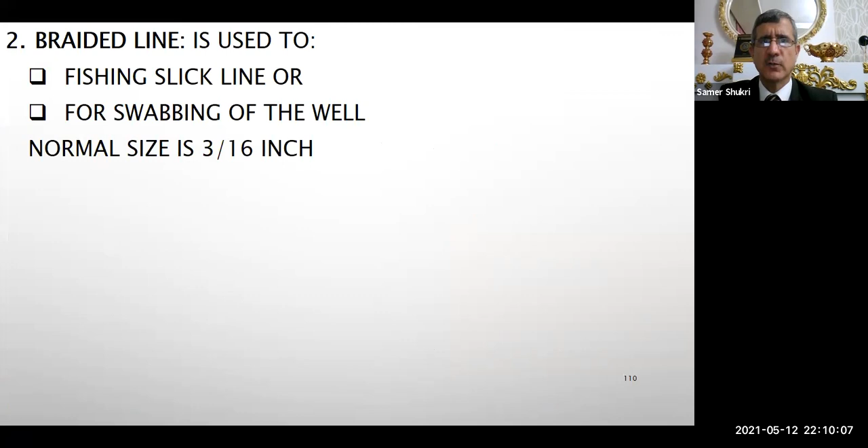A braided line is used to fish the slick line or for swabbing. The size used is normally 3/16 inch, while the slick line we use is 0.108 or 0.125 inch - it is very thin, this one. While this one is 3/16 inch, and this is the 3/16 inch electric line, and it has a conductor, multi-conductor, or a monoconductor inside it.

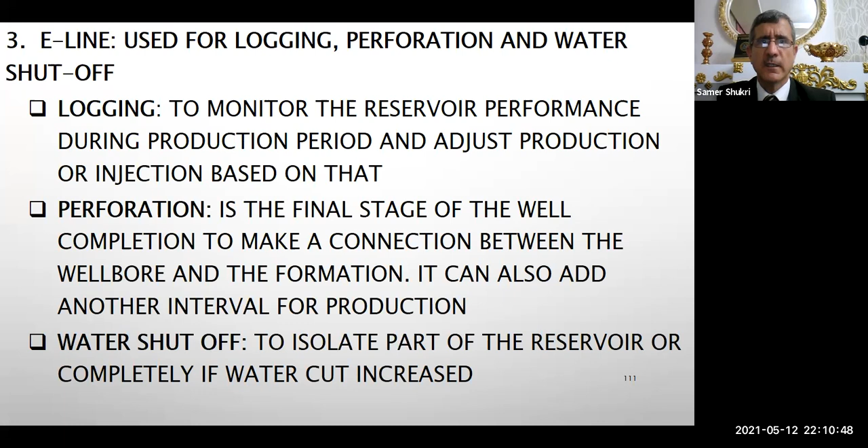Coil tubing. This is the most important invention in the oil and gas industry regarding well intervention. It is a small metal tube run in the well. You can pump fluids inside it, pump gas, or do milling, fishing, perforating, too many operations. So you can save the workover cost and the deferment of oil production. You save money, you save production, you have safety. It is not very expensive compared to workover, but it has very high efficiency. It is quick and simple compared to workover or drilling rig.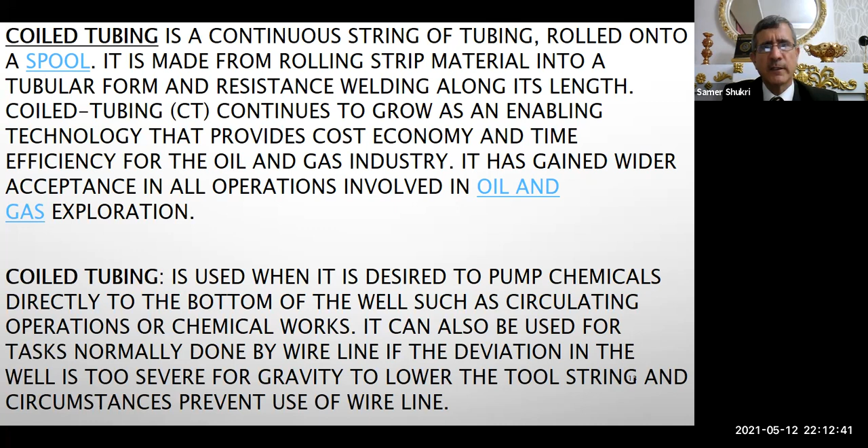What operations can we do using coil tubing? You can do logging, cementing, nitrogen kickoff, coil tubing conveyed perforation, open and close SSD in horizontal completion, stimulation and fracking, scale and sand clean out, milling, fishing, etc.

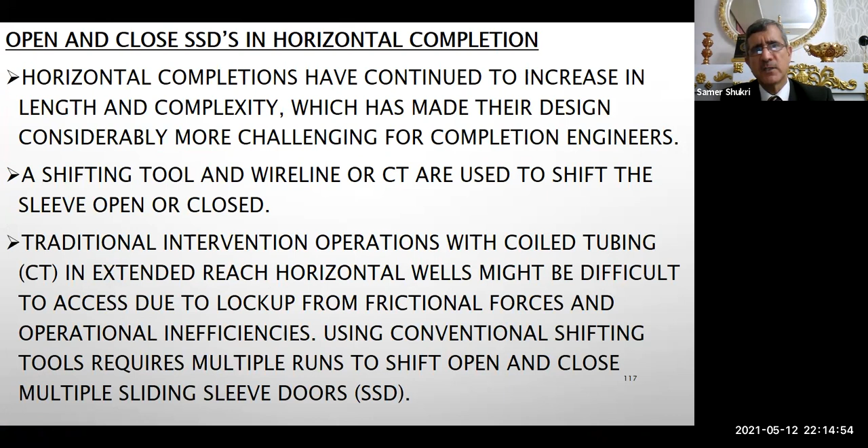Open and close SSD: if you have a horizontal well, you are mandatory required to run the shifting tool on the coil tube, because the wireline goes down under the effect of gravity. But if it is like this, then like this, how can you send it? You cannot, you have to use coil tube. You see this one, this is horizontal well. You run it here, then wireline will stop here. How can you go there? Using coil tube.

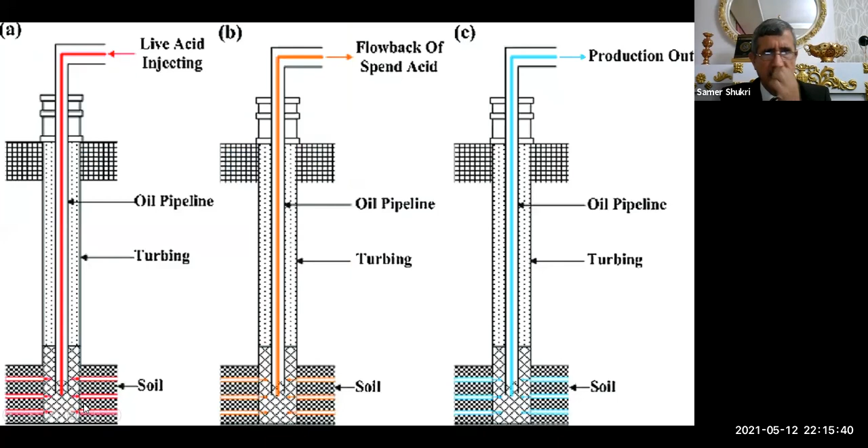Stimulation: when we want to increase the productivity of the well, if we have damage in the formation nearby, we pump acid. If it is acid soluble, bullhead it, inject, then allow it to flow back as spent acid, then the well will produce by itself. So it is a means of reservoir productivity increasing, or stimulating.

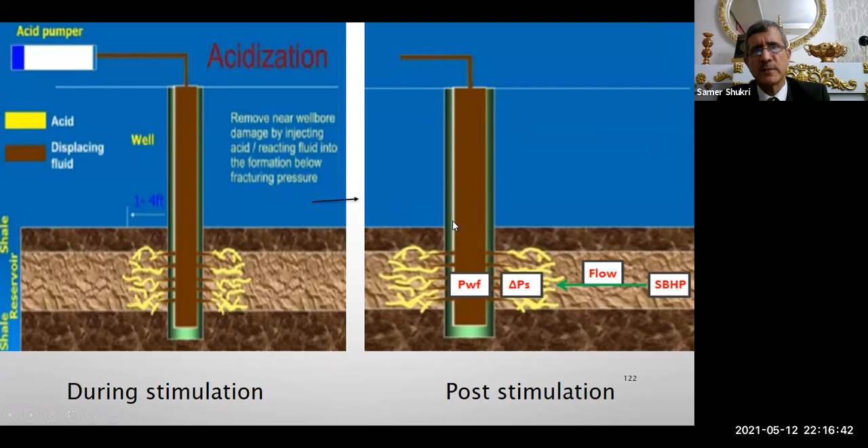Here also, before and during acidizing we pump acid, and here after acidizing. You see that more channels are delivering oil and gas from the reservoir to the well. And here, differential pressure or drawdown, from reservoir pressure till bottom hole pressure. Say the difference is 50 psi, so delta P is 50, and we can see how much we are producing at this pressure differential.

You see how much is the cost, how much is complex. Here is the way.

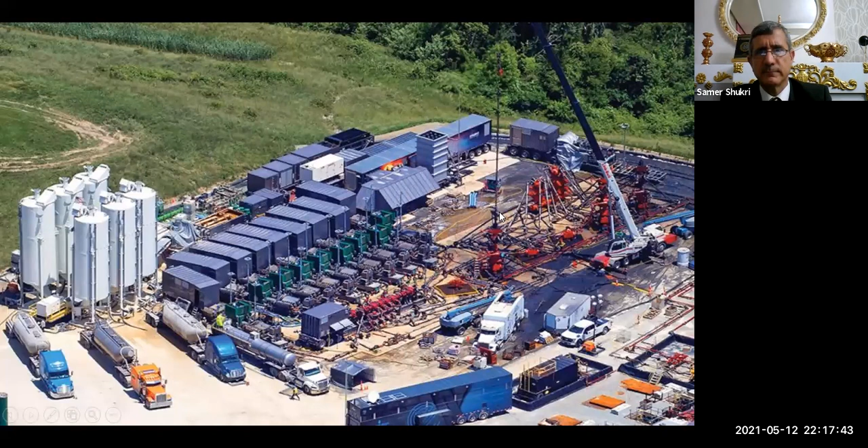Examples, this is the last 4 slides, we will finish. I will give you examples of the question. For the first subject, we have completion operation exam. I have 4 questions. I will tell you how the questions come in the exam.

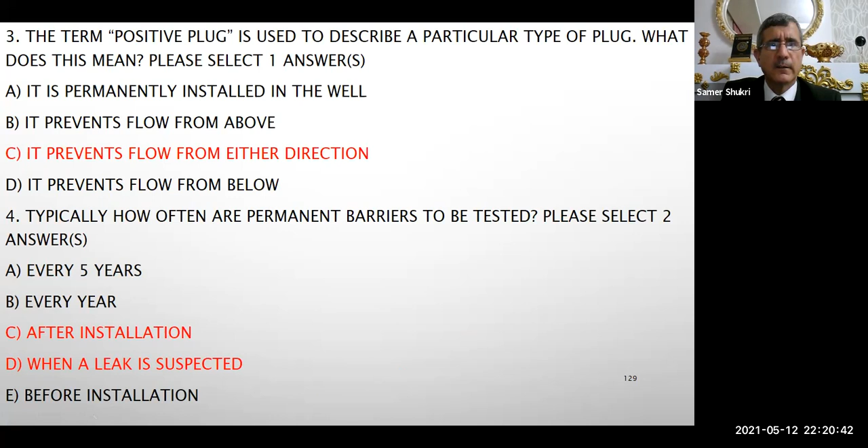We have here coil tubing and wireline. We'll finish with 2 slides, starting with coil tubing.

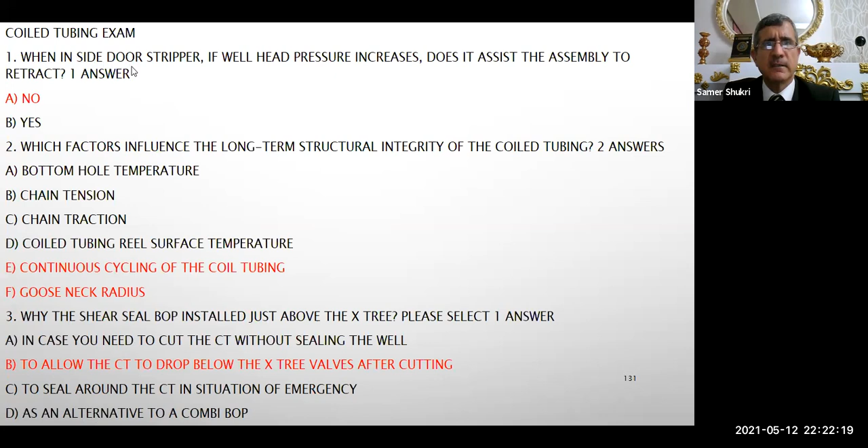Exam question: when using a side door stripper, if wellhead pressure increases, does it assist the assembly to retract? No. There is no relationship between the side door stripper and wellhead pressure.

Question number 2: which factors influence the long-term structural integrity of the coil tubing? Two answers: continuous cycling of the coil tubing and gooseneck radius.

Last question: why is the shear seal BOP installed just above the Christmas tree? Select one answer: to allow the coil tubing to drop below the Christmas tree valves after cutting. So if we cut it, it will drop below the Christmas tree and fall down.

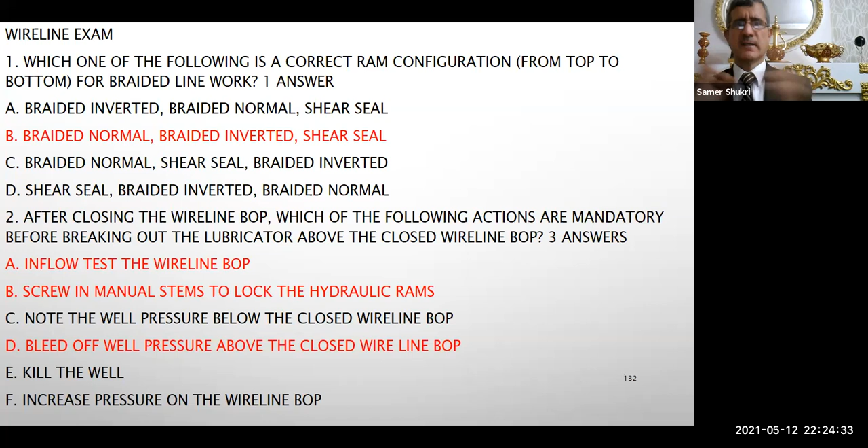Question number 2: after closing the wireline BOP, which of the following actions are mandatory before breaking out the lubricator above the closed wireline BOP? There are 3 answers. First, inflow test the wireline BOP after closing it. Second, screw in the manual stems to lock the hydraulic rams, because if the hydraulic system has failed, there will be no barrier to keep it closed. The last one is to bleed off well pressure above the closed wireline BOP.

So: close the BOP hydraulically, then manually. Then bleed off the pressure above the BOP, then inflow test the pressure above the BOP. These are the three answers we need to know. Here we finish.

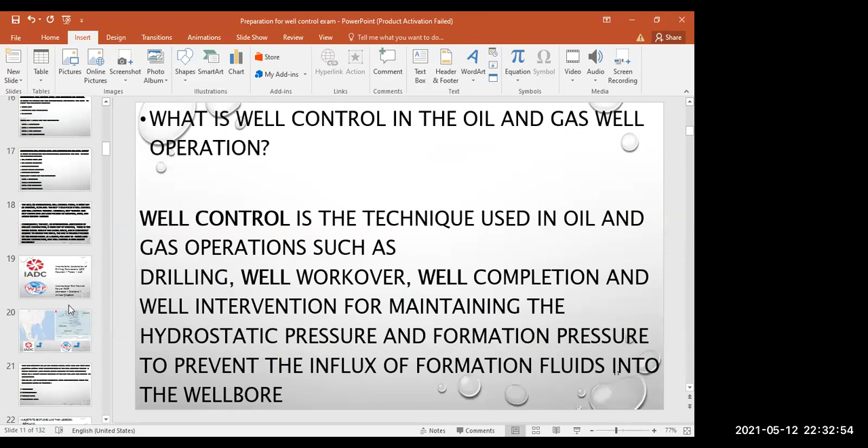This one, you see it? If you stop the video with you, you can take it. The video is recorded now, right? So you can take it. Here is the email to IWCF. Before you send the email, you can go into this one and read it carefully, it is only 1 page. Then you can get a tour of it and see how much difficulty there is for you.

Now you are qualified to get into this exam and pass it. I guarantee all of you, because you have enough knowledge now. If you don't pass, you can try again, and they will guide you. This IWCF, the procedures are here, but this certificate is very important for you because it moves you a step ahead.

Today, this year 2021, you are at level 1. It is mandatory that in 2022 you are level 2, and in 2023, no way, you are level 3 then or level 4. So it is cumulative, the learning.

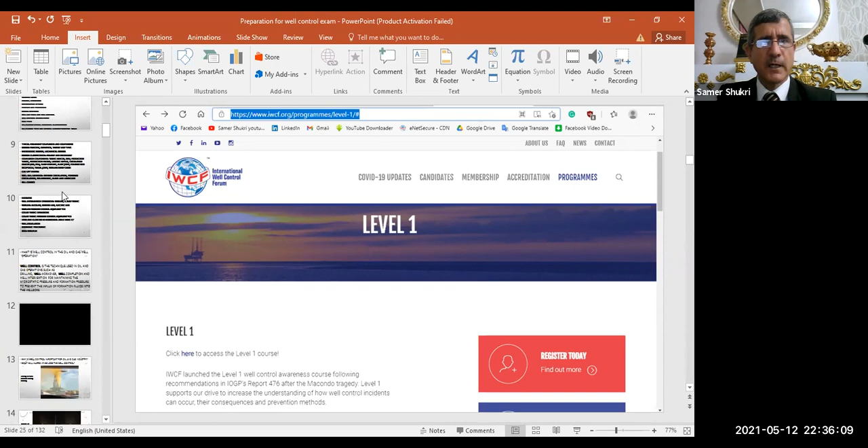So you will follow me on Facebook, you have this Facebook, I will tell you. Because most people are not working, so $1,700 is too much for them. If you go to Facebook, you will see my name, you can send me a friend request and follow me. I will put all posts, I will do a discount. I asked the training company to reduce the cost by 95%.

Are you happy? Yeah, that's great, thank you so much for that. Thank you so much. And, for 5 days, same as this 5 days course, if you pass, you will take a certificate. Okay, thank you so much. Thank you, thank you.